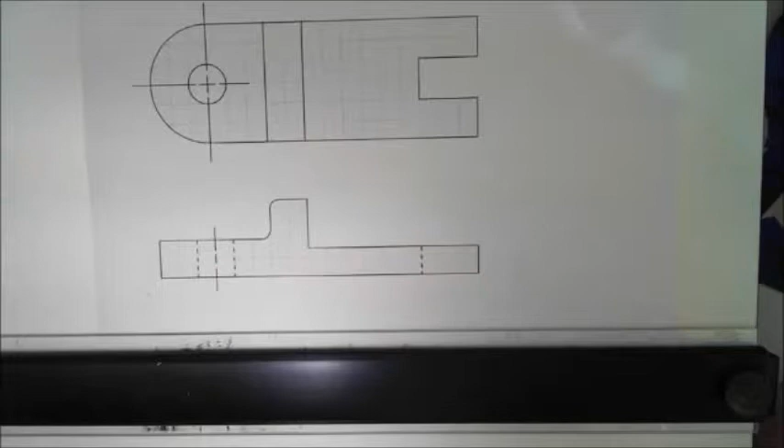Okay, in this dimensioning video, you will need to tape it down and you will need to line it up with your straight edge so we can draw it. You won't have to use any of your scales on it because I'm giving you a specific measurement and telling you what the squares are equal to. So that's how you're going to find those. You're going to have to actually do the math part on your own, but I'm going to show you how to do part of it to make it a little easier for you. And then you go back and make it look like the example.

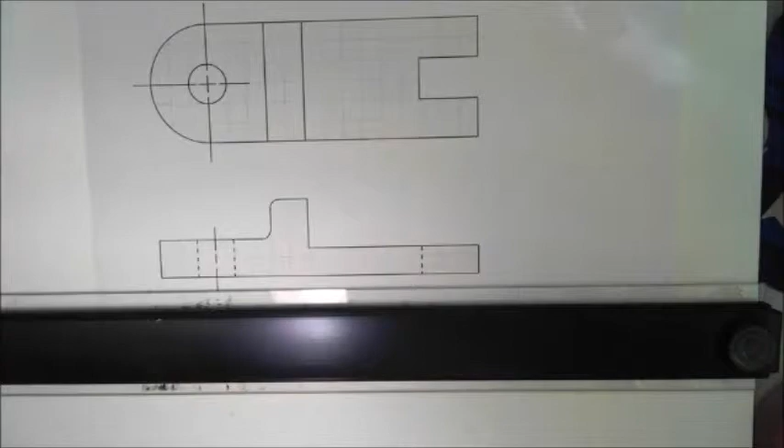So again, it's nice and lined up, so I'm going to use my straight edge here. And when I start off, it's just going to be lightly. Nothing is dark. Everything is always going to, oops, that one got off. Get a brush, clean it off.

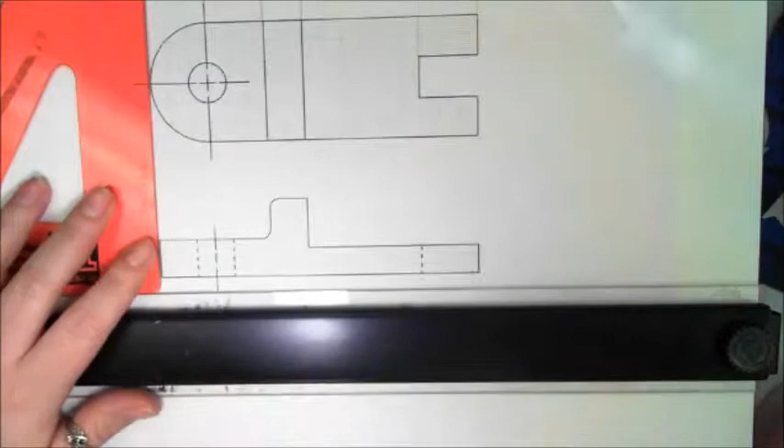So when I'm doing this one, there's a couple things I want to know. I want to know what is my distance from here to here, here to here, here to here. I obviously will need to know what's the size of this radius of the circle. I'll need to know what's the size of the diameter of the circle.

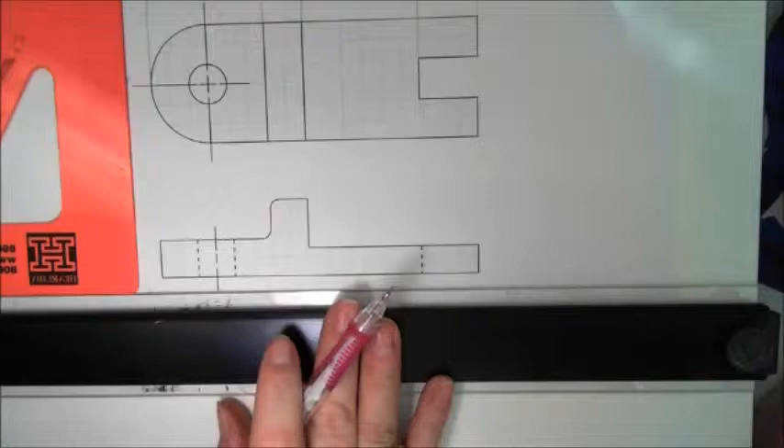So there's some things we have to start looking at here, like what do we need to know? You have to look at the object and see, what do I need to know? What's there? What can I see? What can't I see? What do we need to know? So I need to know. Right at about a 1/4 inch right there.

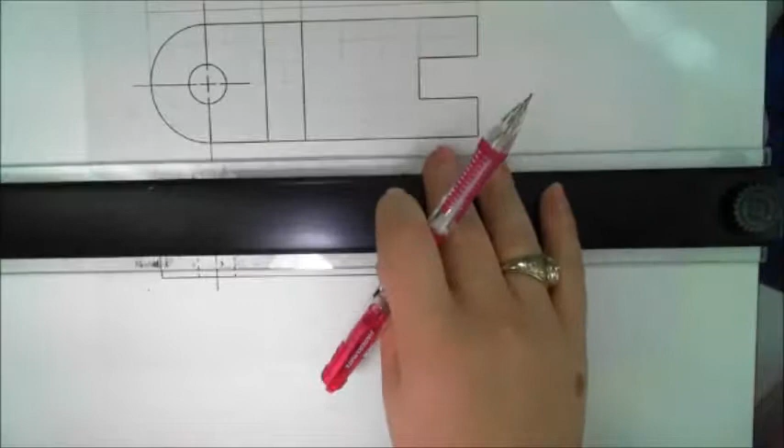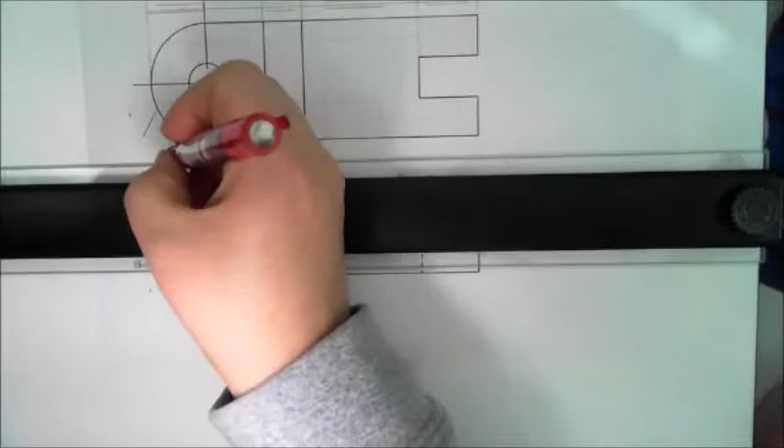Our friend, the eraser shield, to lightly draw our guidelines so we can later put in properly the measurements we need. So I'm just trying to find areas where they can go. So this should start to make a little sense to you. Again, everything's really light at first to start with. And then once you know you've got it right, you can darken it in.

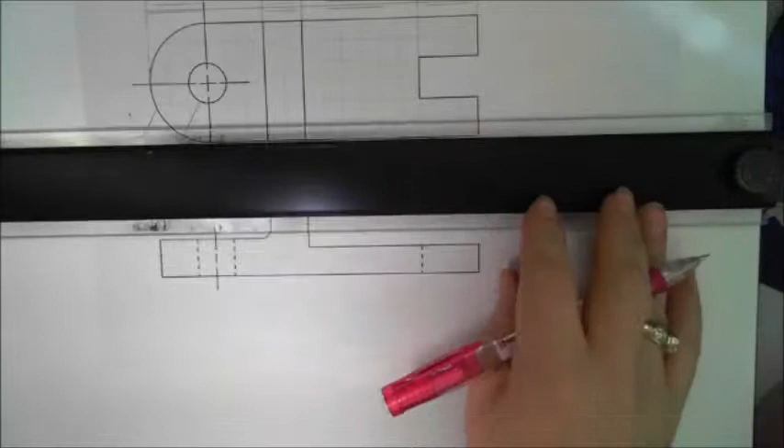And again, our friend, the eraser shield, to get our points. Okay, next, looking at it, I need to know these measurements over here. So again, everything is extremely light to start with. And then it's going to become a little darker when we get a little closer to the end and we know we've got it right.

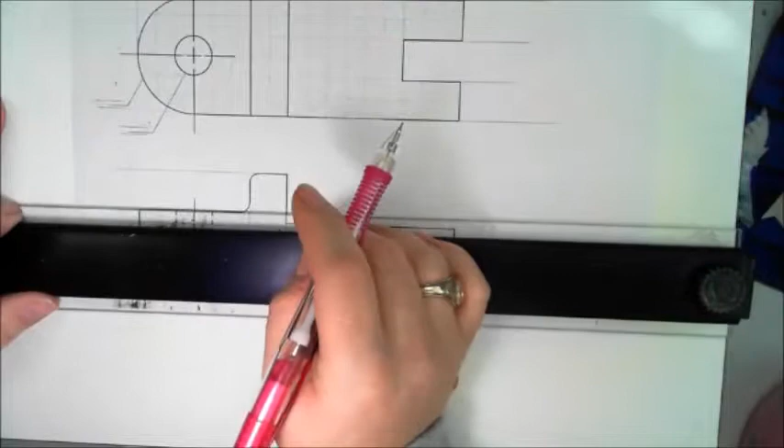Uh-oh, I hear a fire truck outside. It's not a good sign.

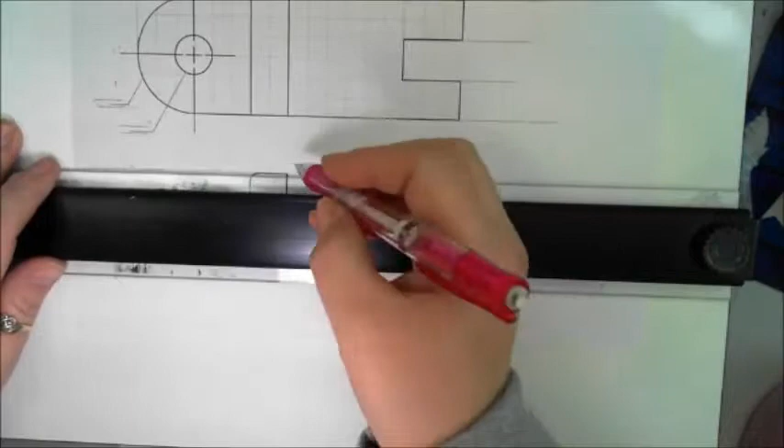But everybody's okay. Okay, so I'm just continuing and drawing those out. I'm not going to pull this out over here. I really shouldn't have to. But you can. To get it overall, what I'm actually going to do, we shouldn't need that because we've got the dimension over here. We can do a couple of things. And actually, I think I'm going to do the overall dimension on this side. Both would be acceptable. And I'm only going to do the little measurement for this part right here.

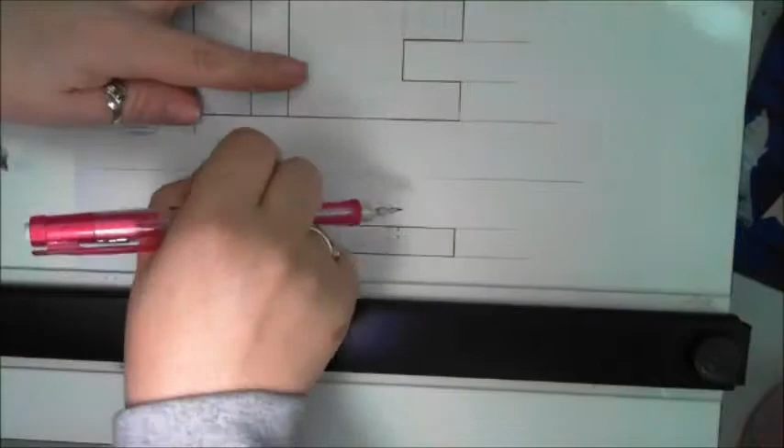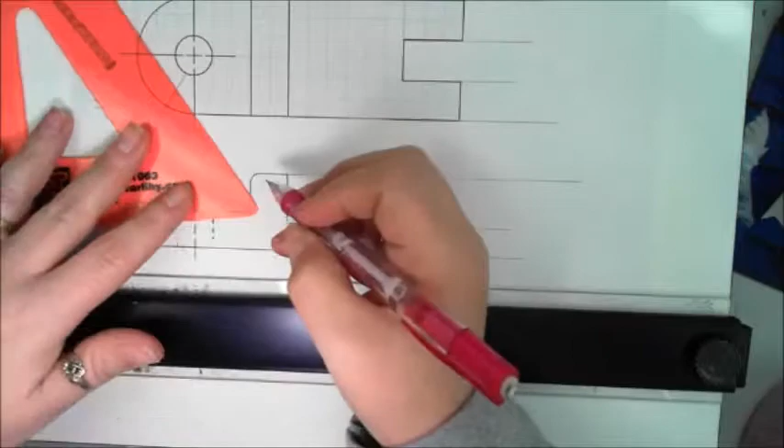So I actually don't need this line. And the reason why I'm making that decision is because I know I need to represent and tell what these two here are. And it really doesn't matter what angle you use. I'm just using it because the 30 is what I have on hand, and it makes it easy for me. Okay, that one I did make a little darker so you can kind of see what I'm trying to do here.

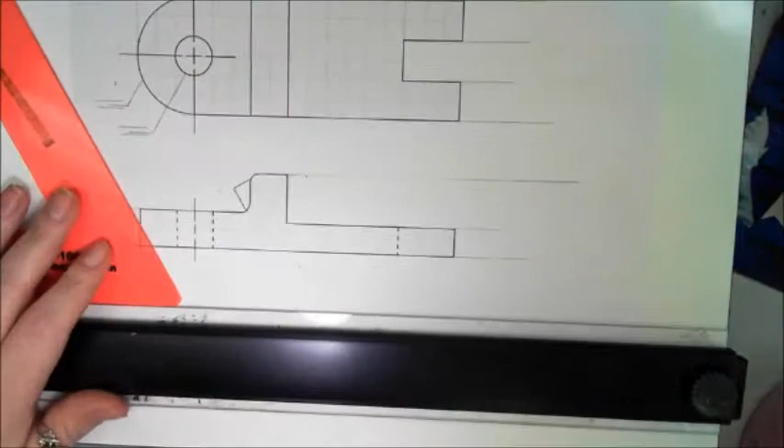And I'm looking at this one as unidirectional, so it means it needs to go all one place, 2 place decimals, so it's going to be all the way down to hundredths. So there's some things you just have to tell yourself when you're doing it. So come here.

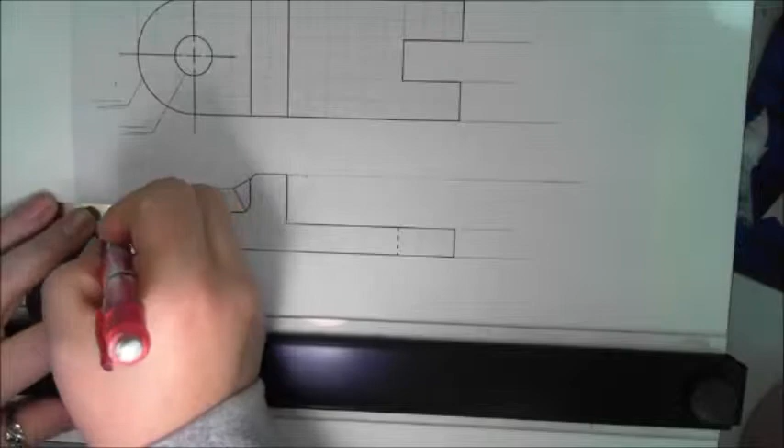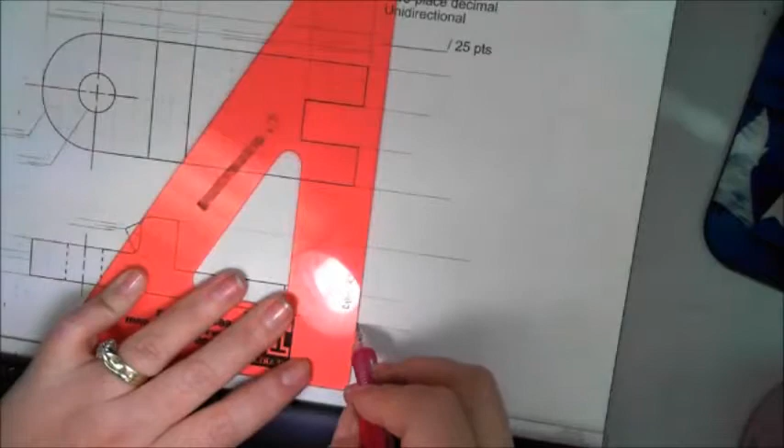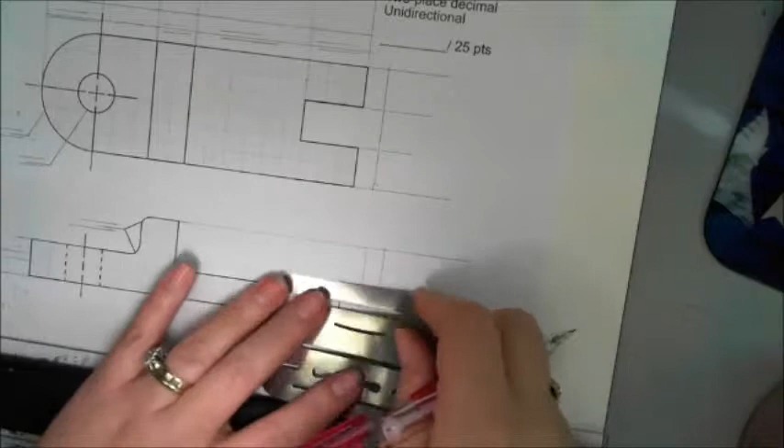Again, I'm marking my little guidelines. Over here, before I do those guidelines, I need to find out where they're going to go. Roughly 1/4 inch out. And then the overall. I don't need the overall for this one because it lines up to the radius of this. So that would be an over dimension, which we want to avoid doing. Remember, always avoid over dimensioning a problem if you can.

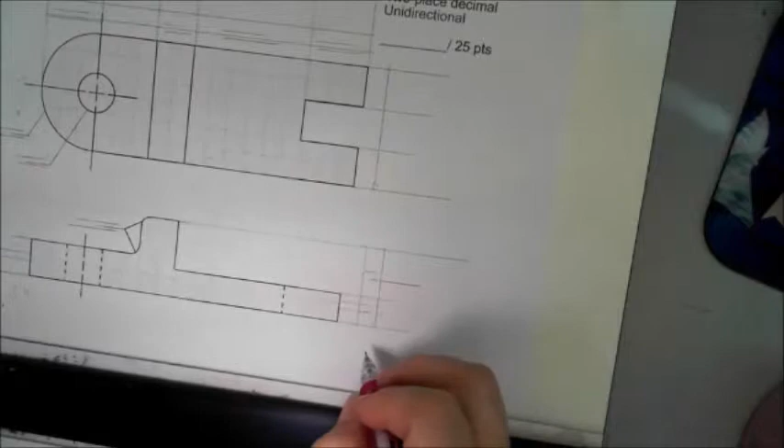Again, guidelines for your dimensions. Keep them nice and staggered so they don't interfere with each other. So I have all my guidelines for my dimensions. And so now let's actually dimension it. And what I'll do, I'll dimension this part right here, and then I'll explain this part, but everything else you're gonna have to do on your own, okay? You can look at the example to try to get an idea, but you're gonna have to do it on your own. So I know that each square is 1/4 inch, full scale, so I know it's a 0.25.

And I look at it and I go, well, no, it's a half. Okay, well, how do I do that? How do I know what that is? Okay, you have to find out what's a half of 0.25. And that's not too hard, right? And that's 125, and then 250. So you have to do a little math and put this together. So this becomes 375. So since we're going to only go to the hundredths, which is the 2 decimal, it would be 0.38.

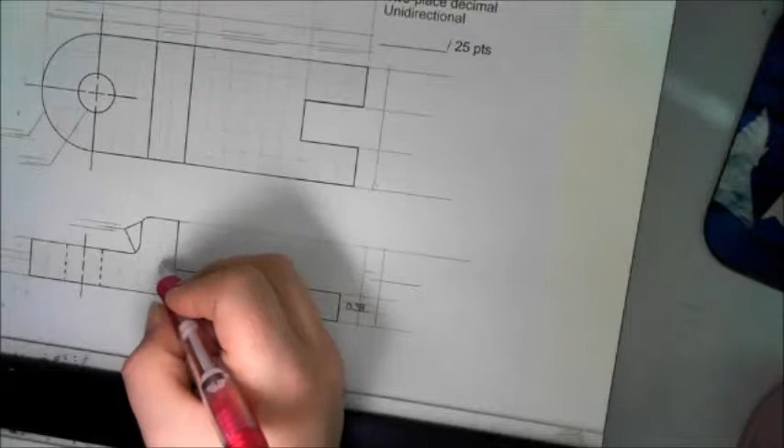So this has become 0.38. And then we want the overall, and since I know it's 0.25 each and there's 4 of them, that one's real easy. It becomes 1.00. So that's that overall depth here. And then I have to look at these and I have to find them. And how the heck am I going to do that? Well, you kind of have to figure out where do they end.

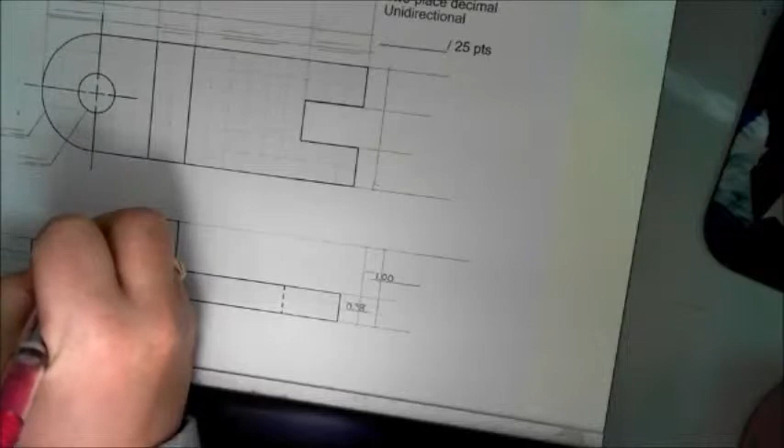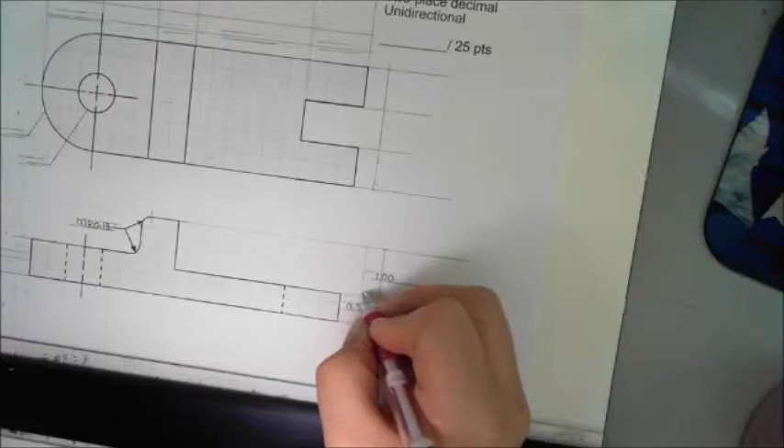And so I know that it's a half of the quarter, so it's at 0.125. So in this case, 0.13. So you're going to have 2 radiuses. There's 2 of them. And that's the 2 inside the parentheses with a radius of 0.13. Darken that in. Add my arrows. Add my arrows. Okay, arrow fits here, no problem. Arrow doesn't quite fit here, so it's actually better for it to go to the outside.

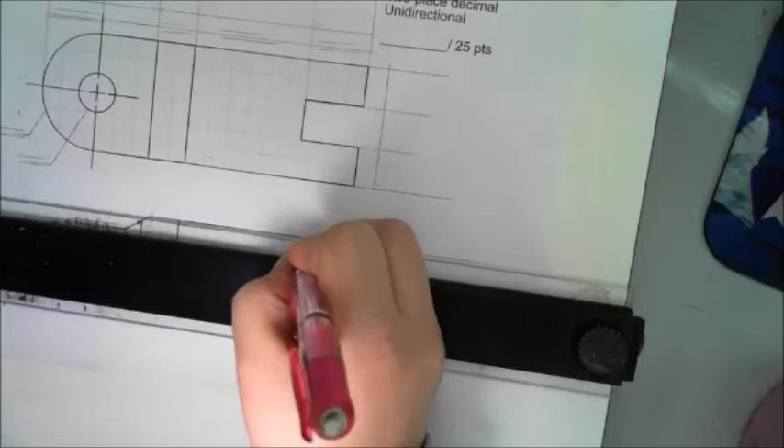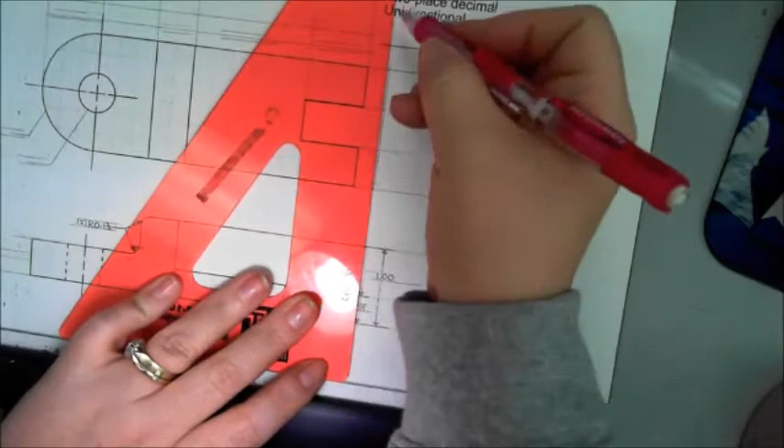I like to put my arrows first because they help me to visualize, see better just what the heck it is that I'm trying to dimension and line up to. Straight edge, leave that about 1/8 inch gap. Just like that. There's a gap. Doesn't hit that line, doesn't come over. It might on your light sketch and your construction line, but it's not on your final. And I want you to see how these are lined up, because your dimensions should always line up. They should not be cockeyed, for a better word. They should be lined up together.

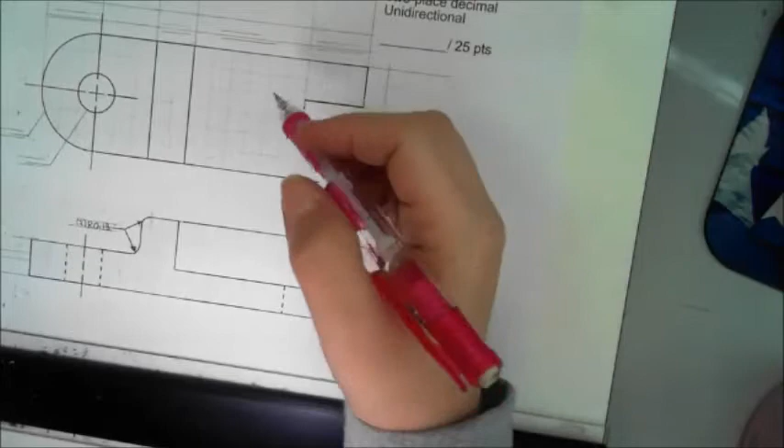And so you just keep going and you do it. So if I was doing this one, that's like a half, so I'm going to draw dimensions, sticking it on there. Am I doing this one? I measure it again, find out what's my depth, etc. How do I find out what the radius is for this? Okay, so if we did the whole diameter, what's half, the radius? Or if you just measure and count here, you're going to put those in.

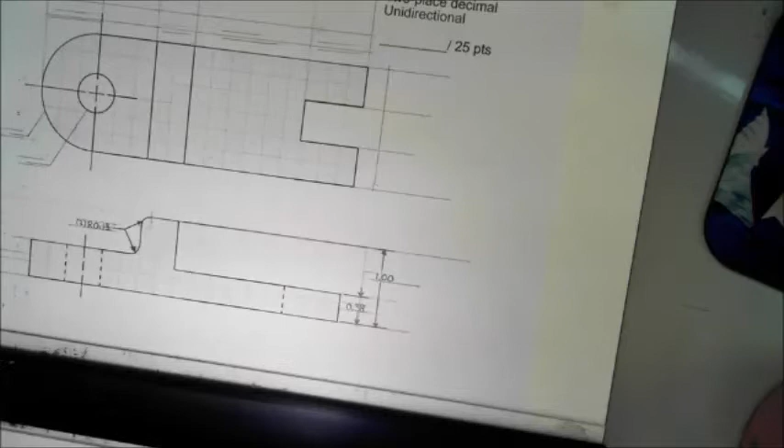This one's a radius. Remember, you only do radiuses for arcs and curves, fillets, rounds, those kind of things. Otherwise, we try to use a diameter if it's a whole circle. All right. You're going to go finish this. You're going to go make it look as much as you'd like the example, and you're going to have to finish doing the last of the math on your own.